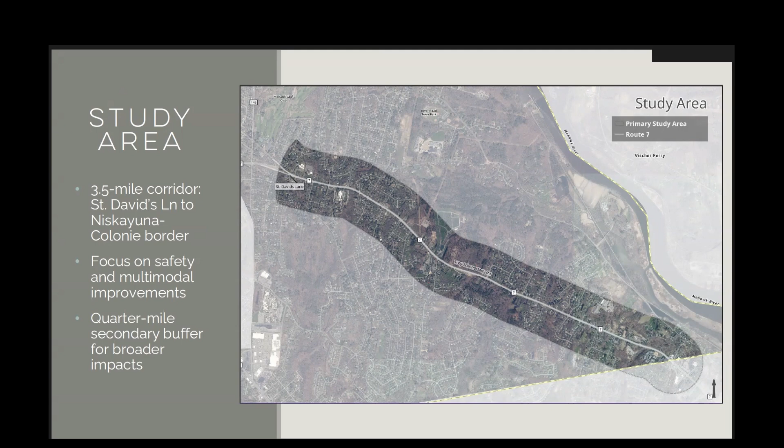Based on the safety goal of the study, we analyzed crash data using the New York State Department of Transportation database, which is a statewide safety data repository. Over the 3-year analysis period, there were 296 crashes, where 23% resulted in injury and 3% resulted in a fatality, which is 12 times higher than the state average crash rate for similar highways, indicating the urgent need for safety improvements. The most common collision types included rear end and head on, while the top contributing factors were following too closely, driver inattention, failure to keep right, and failure to yield the right of way.

We broke this out further by looking at crashes resulting in an injury or fatality. The most common contributing factors were following too closely, failure to yield right of way, driver inattention, and unsafe speed.

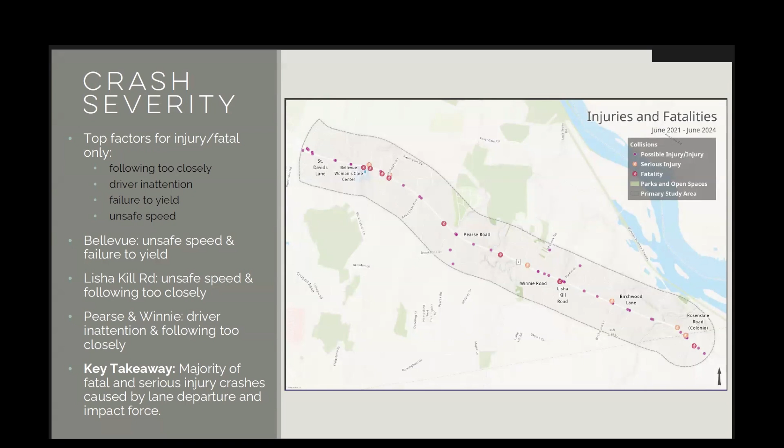Cyclists and pedestrians are vulnerable road users compared to car drivers and are at a higher risk for injury or fatality in a crash. We narrowed the data to looking at bike and pedestrian crashes only.

In the 3-year analysis period, there were 7 bike and pedestrian related crashes. At least 6 of them resulted in an injury, with the 7th being unknown and involving bicycle damage. 2 of these crashes also resulted in fatalities.

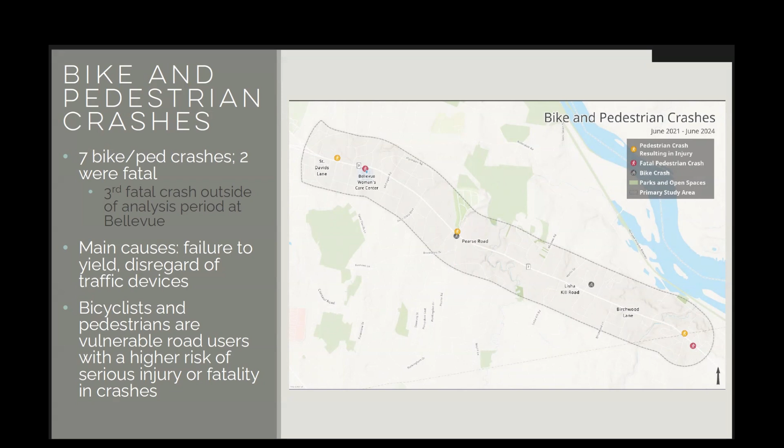Based on the crash data, we decided to look at roadway design. In the study area, Route 7 provides 2 12-foot travel lanes in each direction with a 13-foot wide, 2-way left turn lane. The roadway is curved and does not provide shoulders or edgeline markings.

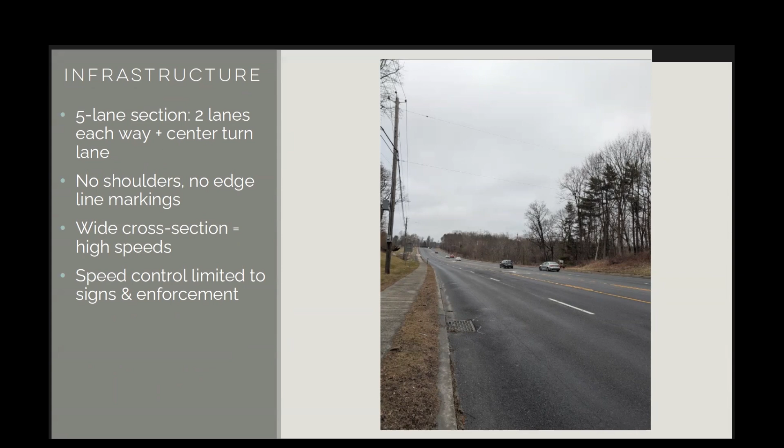Transportation network balances mobility through movement and local access. Different roads serve these functions to varying degrees. Arterials offer the highest mobility but have limited access to adjacent properties. On this map, you can see how Route 7 shifts from an expressway to an arterial. However, this change in function is not always perceived by drivers, resulting in continued high speeds.

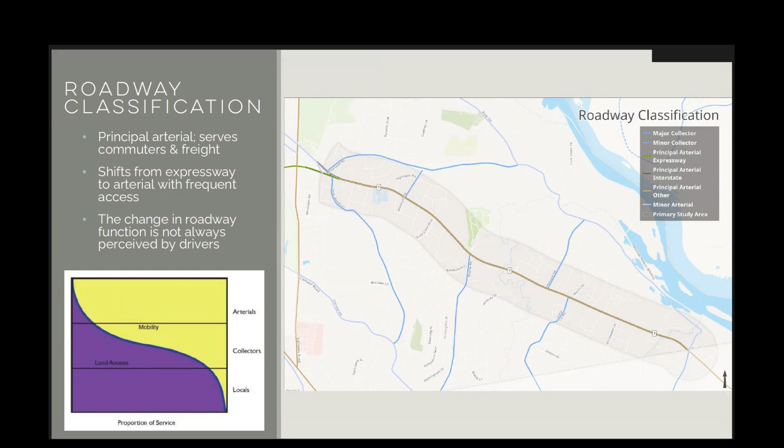Based off the roadway design observations, we decided to look at speed. The posted speed limit on Route 7 is generally 45 miles per hour, with the exception of an approximately half-mile segment near Bellevue Women's Care Center from Primrose Lane to Mohegan Road, which is posted at 40 miles per hour.

Roadway design can affect how fast drivers travel in the wider and more open segments of the corridor. Drivers often travel faster than the posted limits due to the lack of traffic calming infrastructure.

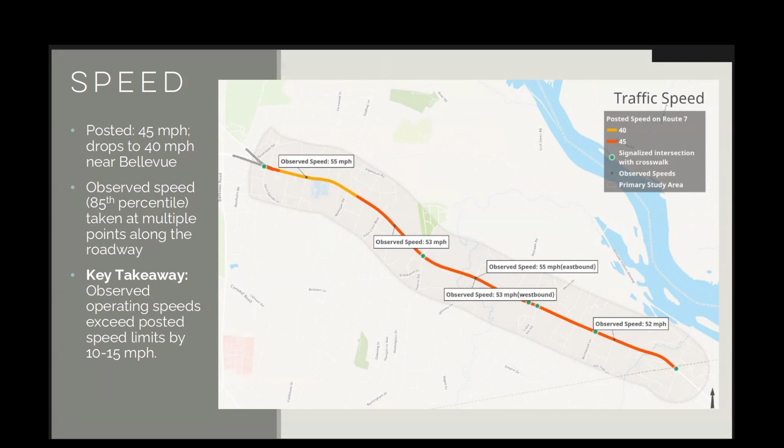Volume, like speed, can also relate to safety concerns within the corridor. Our team looked at how the volumes change along Route 7 as it changes context and municipalities. Compared to the rest of Route 7, Niskayuna falls in the middle of the range of volumes.

Route 7 was also compared to other 5-lane roads in the region. While the volumes are comparable on these road segments, the land use and context are very different. Further consideration will be needed to understand if 5 lanes are needed for the current capacity.

Traffic volumes can also vary throughout the day. ATR, or automatic traffic recorder, data for this analysis was collected from September 2023 to July 2024 and is shown in the chart in front of you, while eastbound peaks in the AM, westbound peaks in the PM. This ATR data was provided by the town and taken at roughly the middle of the corridor.

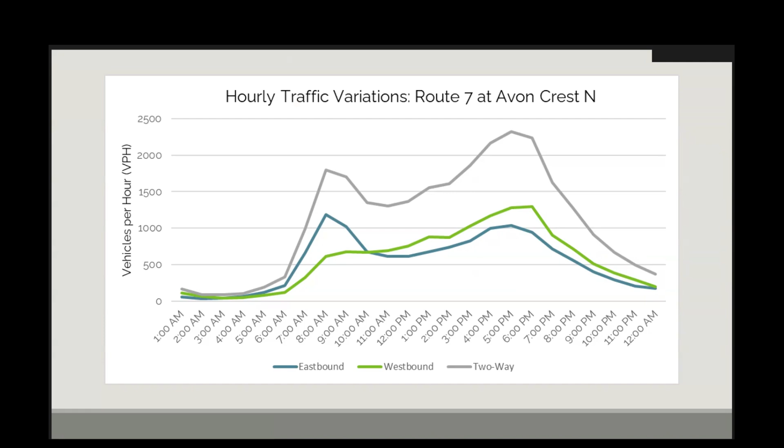Historically, volumes have also differed based on how the roadway looked at the time. Volumes increased from around 20,000 in 1977 to around 35,000 in the early 2000s, with a gradual decline to around 25,000 by 2025. Prior to the 1990 reconstruction, the roadway was 2 lanes in each direction with a narrow curved median. While traffic volumes have decreased since the mid 2000s, crashes have increased.

To evaluate capacity constraints and potential trade-offs, we looked at vehicle level of service throughout the corridor. Vehicle level of service is a letter grade ranging from A to F, where LOS-A reflects minimal vehicle delay and LOS-F indicates longer vehicle delays and potential congestion.

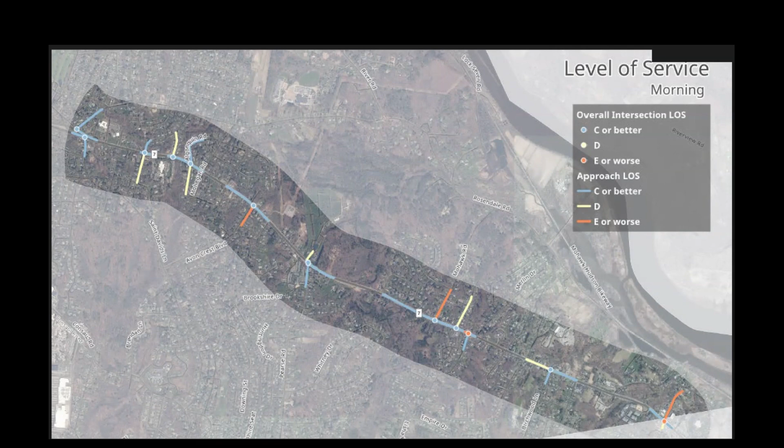Similar to AM and midday, most intersections in the evening peak operate at a C or better. Algonquin and Hickory Road near Bellevue Women's Care Center and Rosendale Road on the eastern end all have approaches from the north operating at a D, and Mohawk and Winnie Roads have approaches from the north operating at an E.

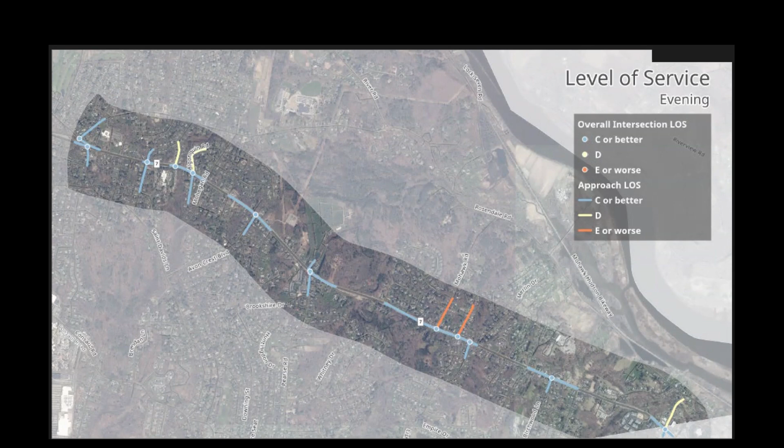To understand who's traveling through the corridor, travel patterns on Route 7 were assessed using Replica, an online travel modeling tool that provides estimated trip activity characteristics.

Of the total trips, 96% were taken by car and an additional 2% by trucks. Walking and biking account for a small portion of trips at only 1%. It's also assumed that Route 7 only makes up a small portion of total trips, with the average trip taking 28 minutes and the study area only taking about 5 minutes end to end. The majority of trips on Route 7 are most likely made by commuters, indicated by the high number of home and work trips.

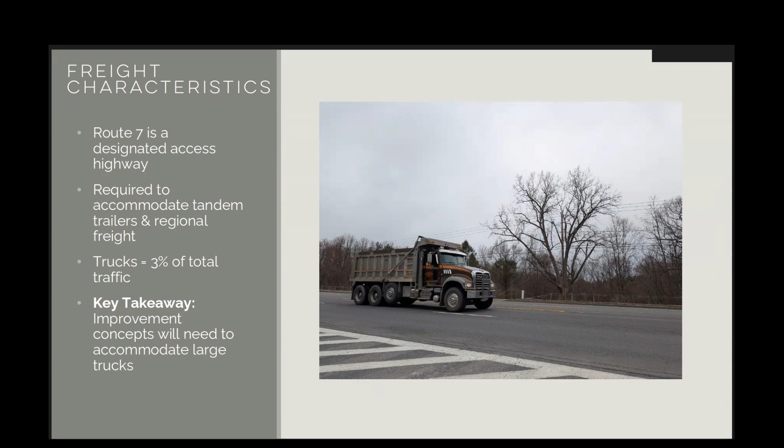In the study area, Route 7 is a designated access highway, which permits use by extra large trucks, including tandem trailers. Trucks make up 3% of the total traffic, indicating that improvement concepts will need to accommodate large trucks.

We also looked at pedestrian infrastructure. This picture was taken at St. David's Lane and shows the cracked and overgrown nature of the sidewalk that can be seen in various spots throughout the corridor. While there are sidewalks on both sides of the street, their condition remains inconsistent. There are also long distances between marked crosswalks across Route 7 because they're only at the intersections with signals. The longest of those is 1.5 miles between St. David's Lane and Pierce Road.

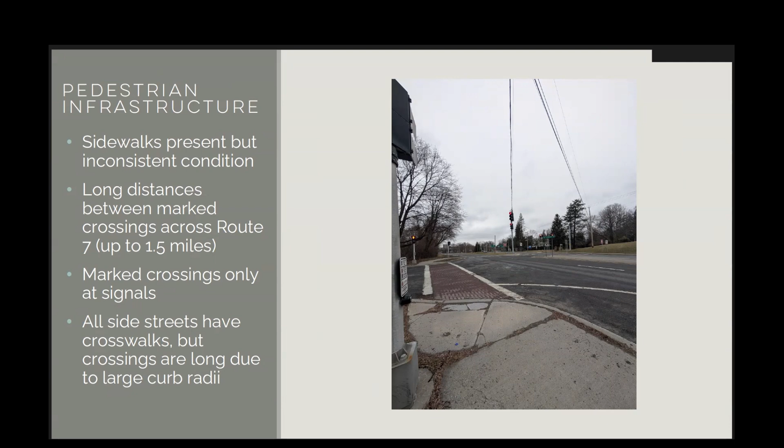We also evaluated bicycle facilities in the corridor using the level of traffic stress, or LTS model, which classifies roadway segments into 4 levels of stress cyclists are expected to experience based upon roadway and bicycle facility design characteristics. A review of these characteristics on Route 7, including a lack of bike lanes and shoulders, indicates that cyclists riding on Route 7 experience an LTS 4, which corresponds with a high stress environment and contributes to the low bicycle usage.

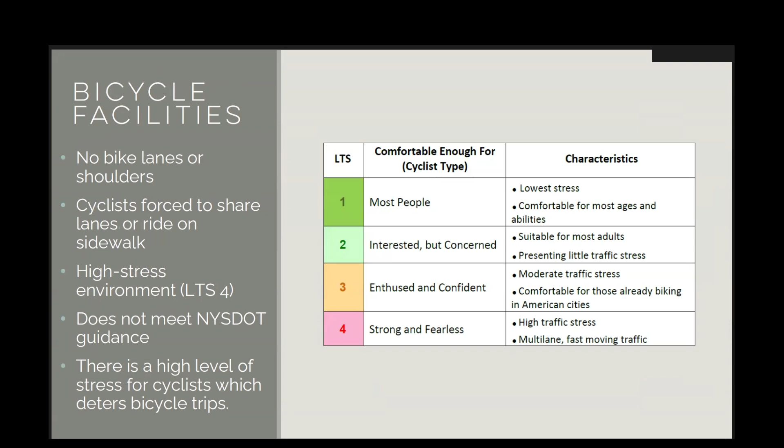Because of higher bicycle stress, many cyclists choose off-road trails for getting around. While Route 7 is generally disconnected from the nearby trail system, the town has achieved the Flower Hill Trail, providing a connected off-road trail in the corridor. It's important to note, though, that there is currently no direct east-west option for commuters. The existing network poses a potential opportunity for future active transportation links.

Transit was also evaluated in the corridor. CDTA Route 370 serves Route 7 every 30 minutes at peak on weekdays and 45 minutes at peak on weekends. While stop coverage is sufficient for the area, all stops lack shelters and have inconsistent lighting throughout the corridor. Most riders are through riders, indicated by the less than 3 riders per day per stop, with the exception of Vly Road, which sees an average of 10 riders per day.

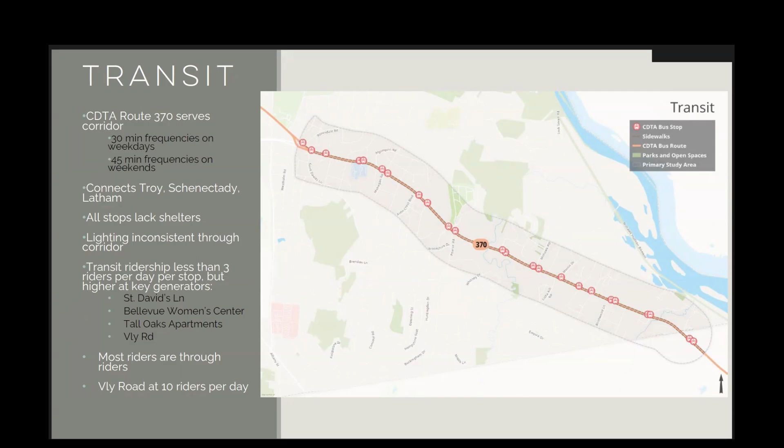Zoning in the corridor is predominantly residential, with low density residential as the primary zoning type. It transitions to medium density residential near Shannon Boulevard and further east. It also includes some higher density housing, such as apartments and senior living communities. Homes are also typically set back from the roadway with access via side streets.

Route 7 includes several schools, churches, and medical offices. These institutional uses generate varied traffic patterns throughout the day. There is higher pedestrian activity near schools and healthcare facilities. This highlights the need for marked crosswalks, pedestrian signals, and traffic calming measures with a goal to improve safety and access for all users.

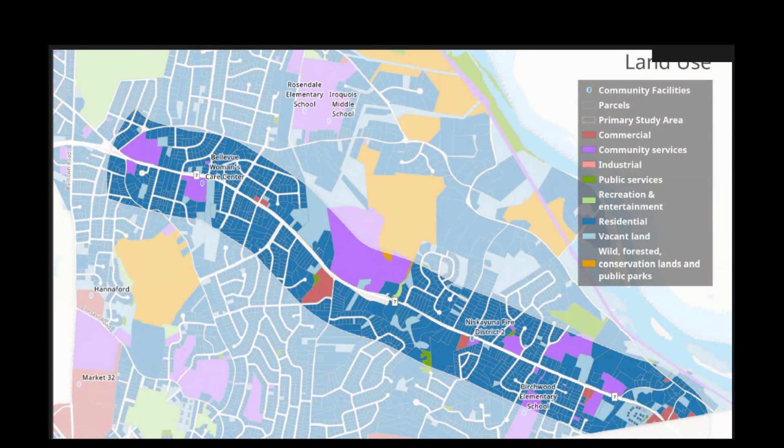While most parcels along Route 7 are private residential, publicly owned parcels along the corridor present opportunities for implementing safety improvements and enhancing pedestrian and bicycle infrastructure.

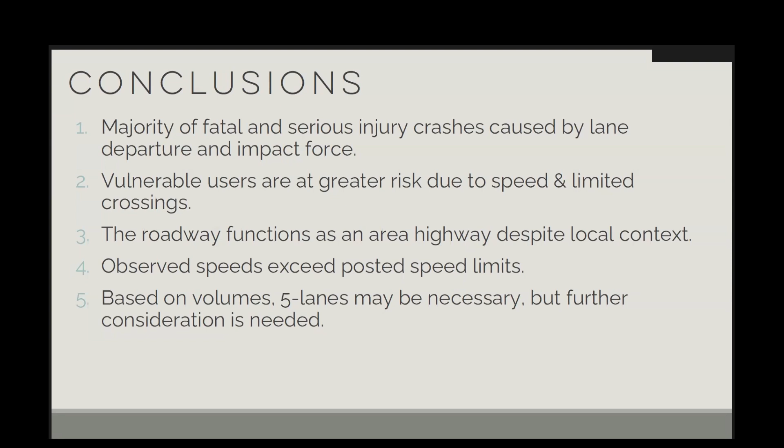To conclude this presentation, we've summarized the key points from the existing conditions data. As it relates to the safety objective, high speeds, crashes, and vulnerable users have all been observed in the corridor. There are also opportunities to address the connectivity objective with low bike and ped users currently and the potential for future design concepts to address connectivity improvements.